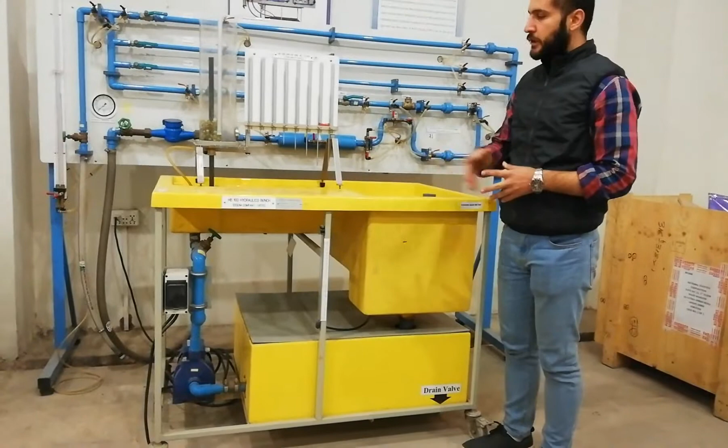Its orifice setup. We have set it on the hydraulic bench. I have already told you how the hydraulic bench works, how it flows and how this range works. Before going into details of the hydraulic bench, we don't have enough time, so we are directly going into the orifice meter.

Here it is attached, connected with the input valve, and here the supply goes on. This comprises a tank with an overflow valve. If it overflows the limitation, it will go down and overflow here. It comprises, you may say, needles with different calibrations. Here it is in centimeters.

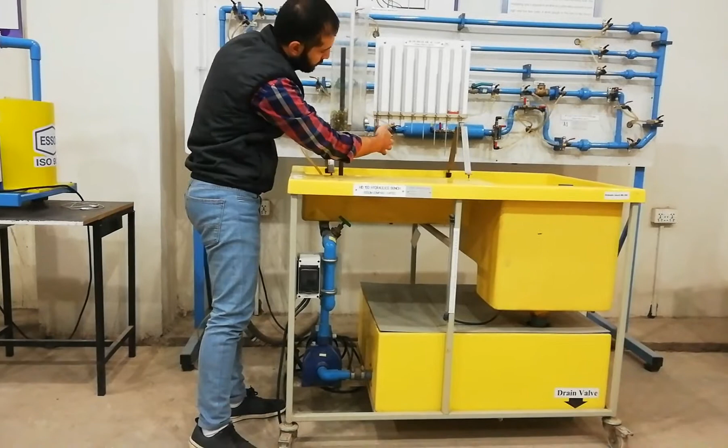So it comprises at least 1, 2, 3, 4, 5, 6, 7, 8 needles to show the measuring heights. Here, if it can be seen from here, it comprises an orifice. It is 4 millimeters in diameter. So we already know the diameter of the orifice.

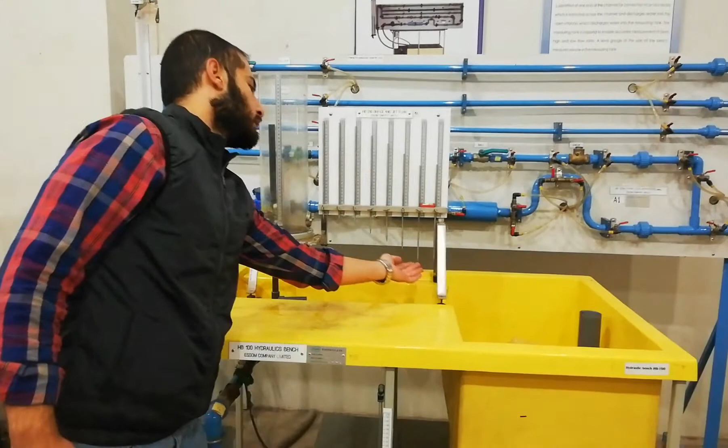Now what is the principle? Actually the principle is that it just touches the tip of the needle and it goes and is stored in the tank. So I am going to switch on that valve and find out the behavior. Our target will be to know the x and y coordinates of that flow, because we are going to find the x coordinates by having different measurements, and the y coordinates, so that it only touches the jet flow. It is not interfered with by the needle, it only touches the flow gently. Okay.

I am switching on. The overflow has been set. We may vary it, but it's set at about 29 centimeters, and the orifice behavior has been shown. As you already know, an orifice is an opening through which the water flows.

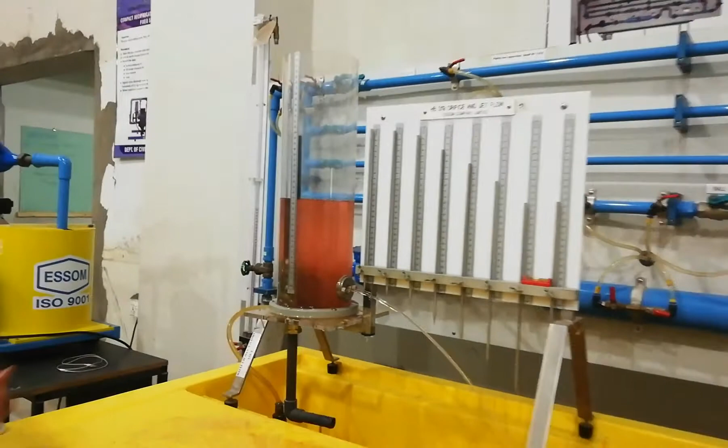Now our target will be to show the smooth flow with only touching of that needle, and after that we are going to find out the XY coordinates of that jet flow and the discharge by storing in the volumetric tank according to the time. Now what I am going to do is set the needle gauges.

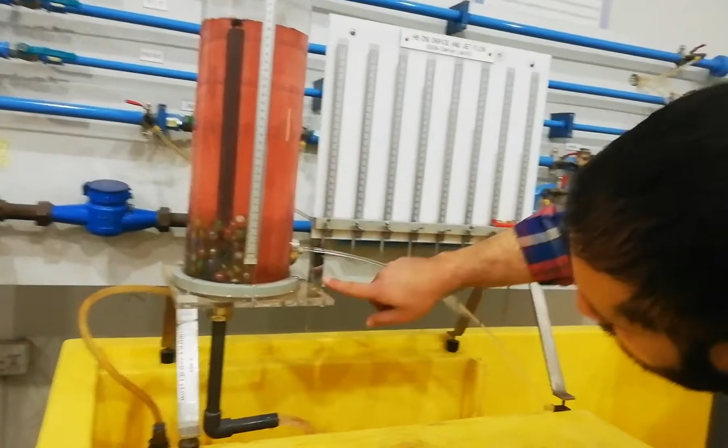It can be seen that it only touches the flow. Okay, it's not touching, it's a little bit above the stream. So we are going to adjust it a little bit. Now it's touching again. Gently, we have to be very careful for that. Gently making it down. And it's okay. Can you see that it only touches?

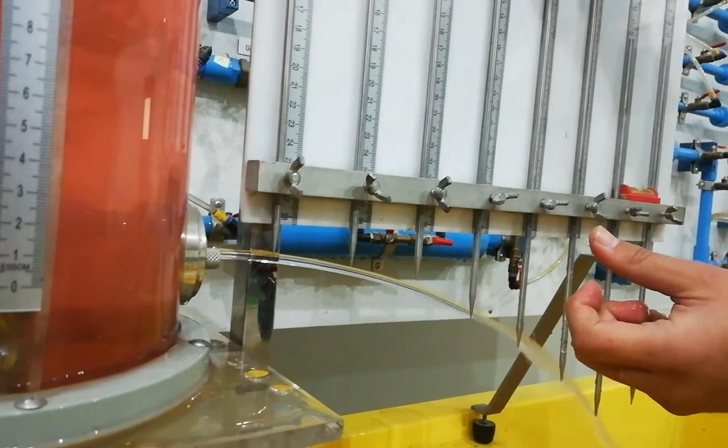Now here there's a gap again. We have to make sure that gap doesn't exist. Gently making it down towards the flow. Okay, again it's touching and disturbing the flow. It's just touching the stream. Again it's compressing the stream, and we are going to make sure it only touches the stream.

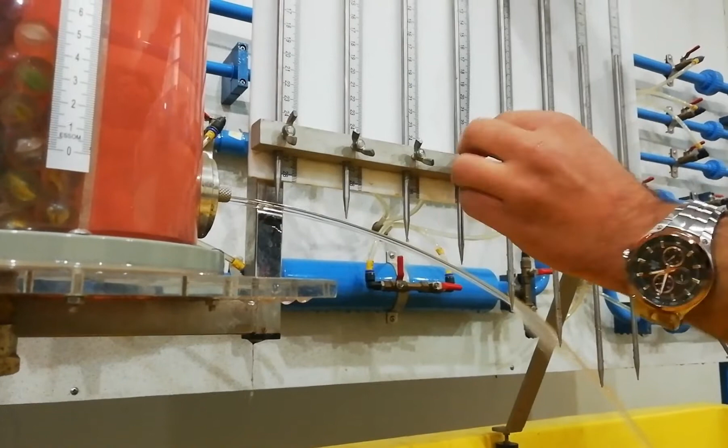Again it's intersecting the stream flow. We are making sure that it touches but doesn't vary or disturb the flow. Again the path is not disturbed by this needle, and after this we are going to find the jet coordinates. The coordinates may be measured by x-axis and y-axis, and it's simply a concept that the y coordinates will be measured by the ruler. It's already provided here.

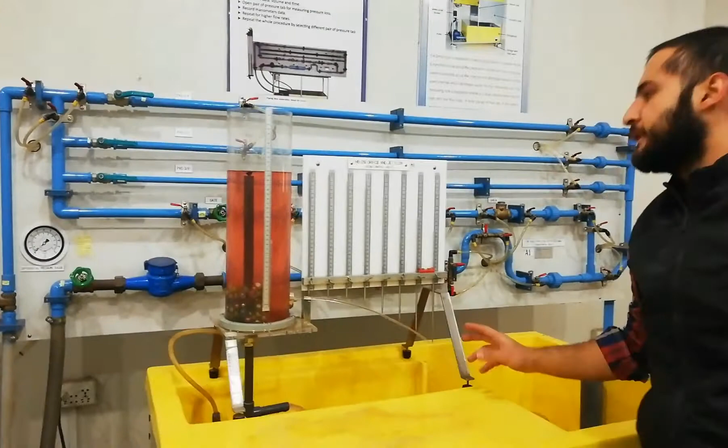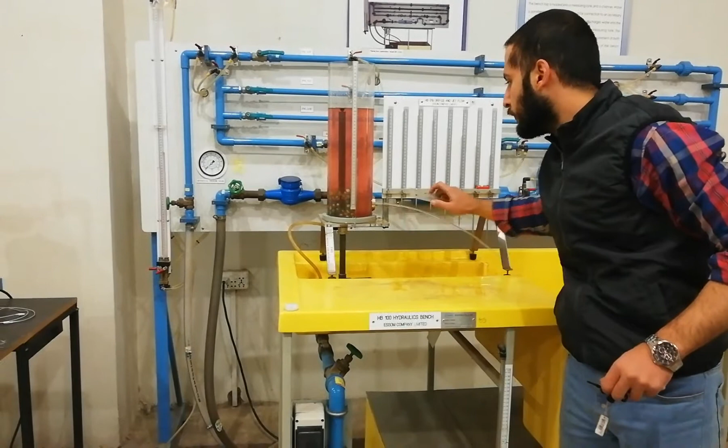It's still fluctuating, but approximately we are going to have our maximum preciseness, as human error exists. It's fluctuating, but we use our visual eye to make sure, and now I'm pretty sure that it only touches the tip of that needle. Now what is to be done is, firstly we are going to find the x coordinates. Here we take x1 as 0, and x2 will be from the precise mid to the mid, it's 5.

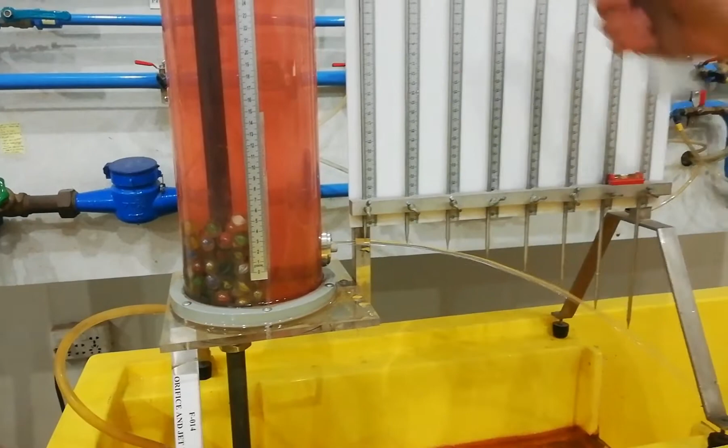Approximately, it's 5 centimeters. So x1 will be 0, x2 will be 5 centimeters. And y1 will be 0, y2 will be about 0.6 centimeters.

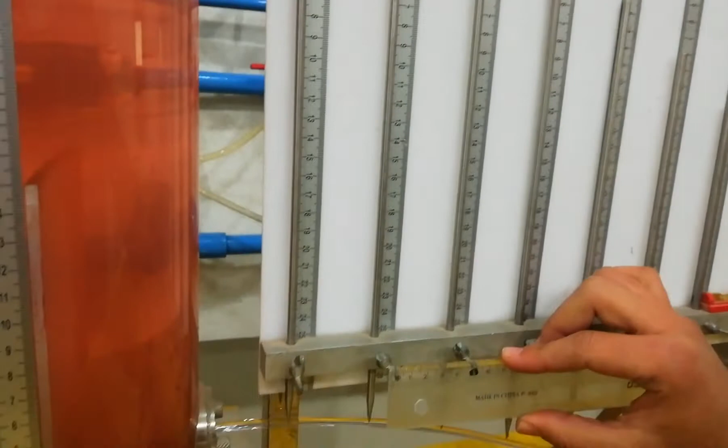Now, thirdly, y will be 1.9 centimeters with the horizontal coordinate of 5 centimeters. For the fourth, it's about 3.1 centimeters for y, and the distance will again be 5 centimeters.

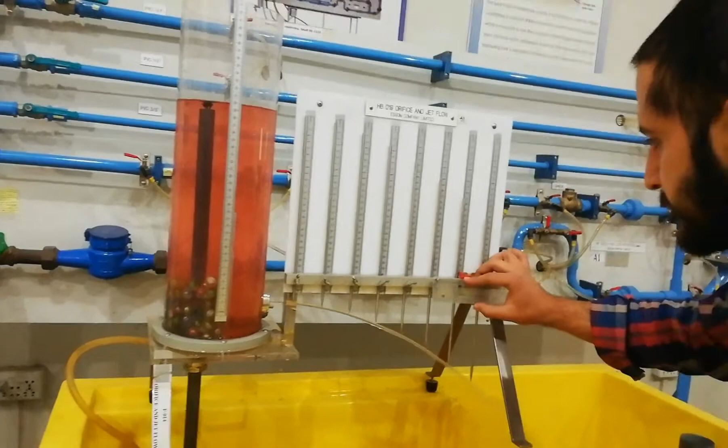So going further, it's approximately 5 centimeters for each of the x-axis, and for the y we are going to find out each coordinate. Now it has been done.

Now I will take a jug. Measurement has been done in milliliters and liters as well, so don't get confused. I will go for the liter, 0.5, 0.7. I am going to take approximately 1 liter to find out the discharge according to the stopwatch.

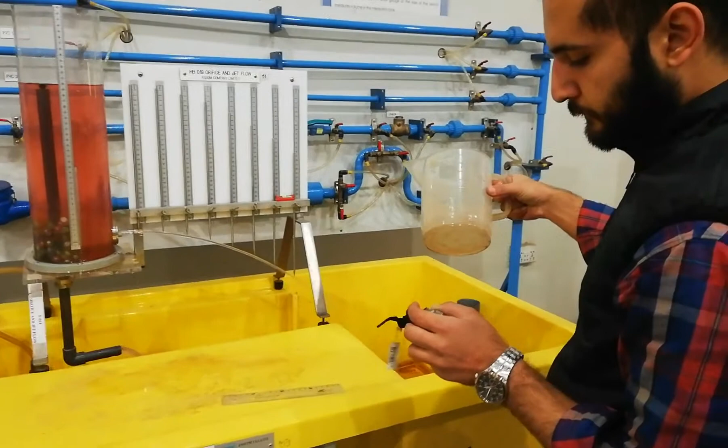So what I am doing is asking my fellow to start the stopwatch and collect a volume of about 1 liter. So let's start.

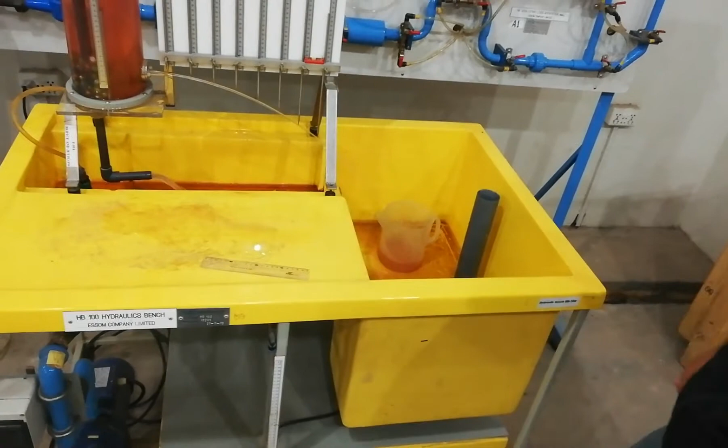Our flow is not disturbed, and that's eased by the needle. It's about 1 liter in a time of 20 seconds. So the stopwatch has been used to record that volume of 1 liter in 20 seconds.

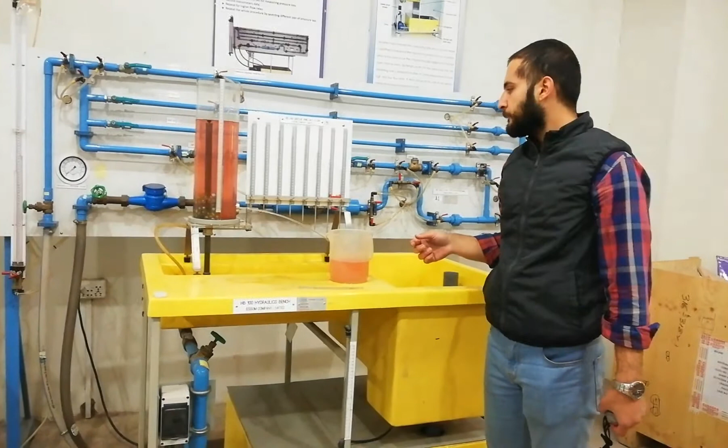So CD is equal to actual discharge divided by theoretical discharge. CD, the coefficient of discharge, has been found out, and now the coefficient of velocity will be found out by using the coordinates. That's how we will use our orifice meter, and that's how the demonstration will happen.

Thank you. So for now, observation and calculation of the flow through the orifice.

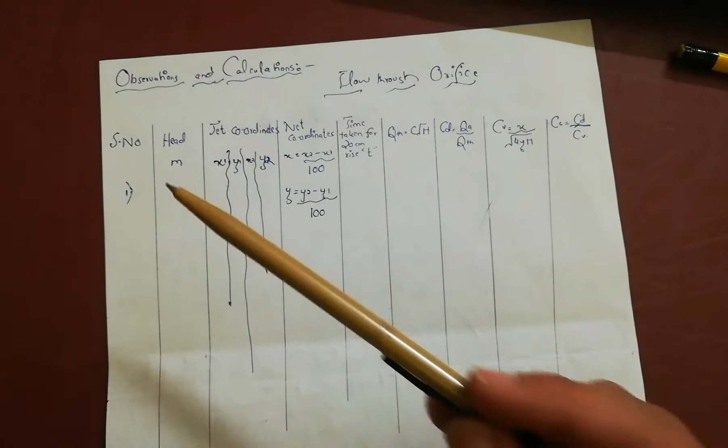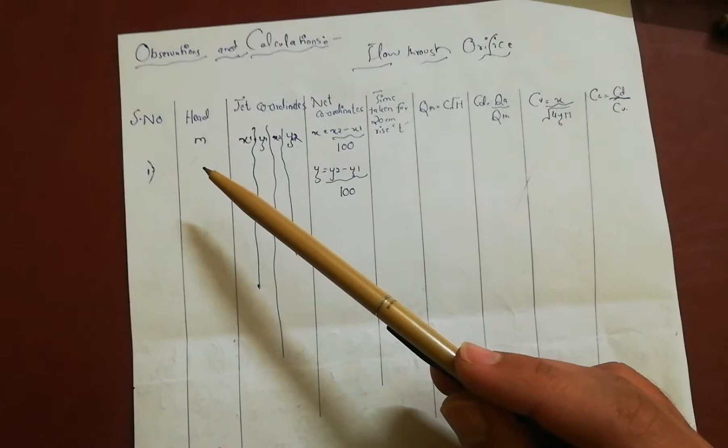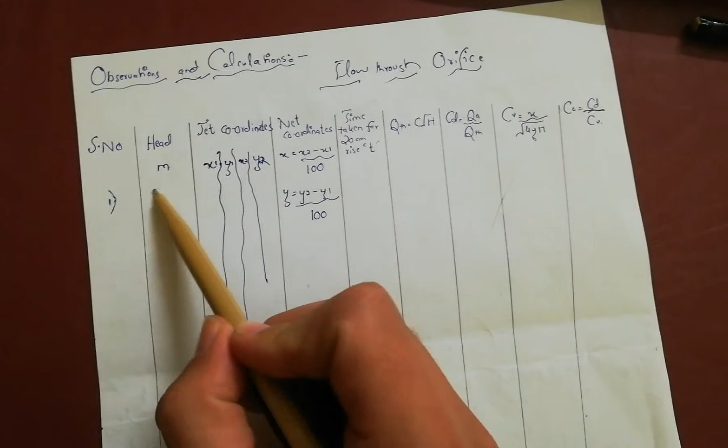Firstly, we are going to set the head as we wish, so sort out the overflow. As in practical, we may remember that we have taken our head as about 39 point something centimeters. So just put there a centimeter reading of 39.8 centimeters, or maybe 5, whatever it is.

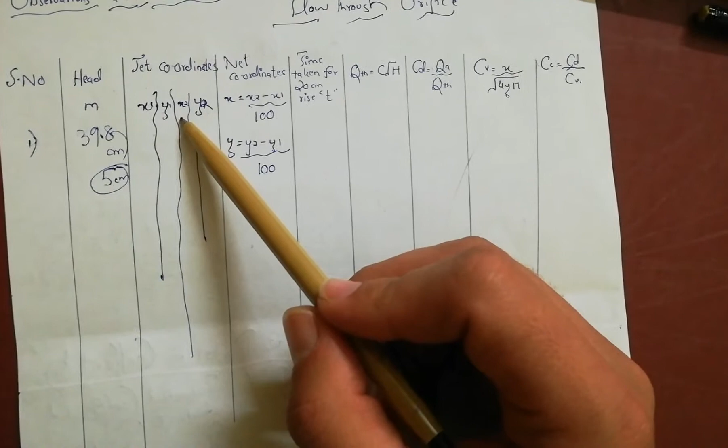Next column is the jet coordinates. The jet coordinates are x1, y1, x2, and y2. X1 is just the horizontal distance, and y1 is just the vertical distance. Similarly, x2 and y2 are the other coordinates which we have to put in the table. X2 is the horizontal distance measured by the second gauge needle, and y2 is the distance covered vertically by the second gauge needle.

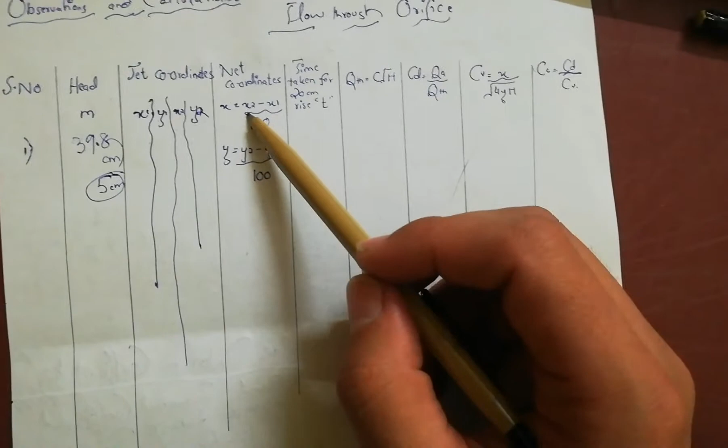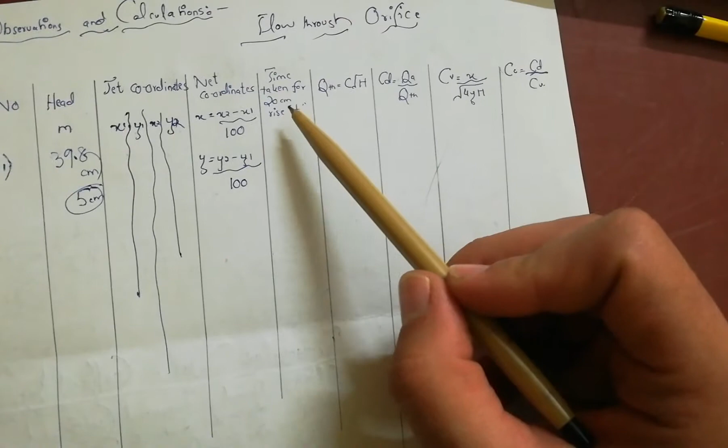Net coordinate x is equal to x2 minus x1, divided by 100, and y is equal to y2 minus y1, divided by 100. The minimum x2 minus minimum x1 can be obtained from these tables. The time taken for the 20 centimeter rise—we have taken just 20, but you may take 10, or even 5, or 30 centimeters. It depends on you.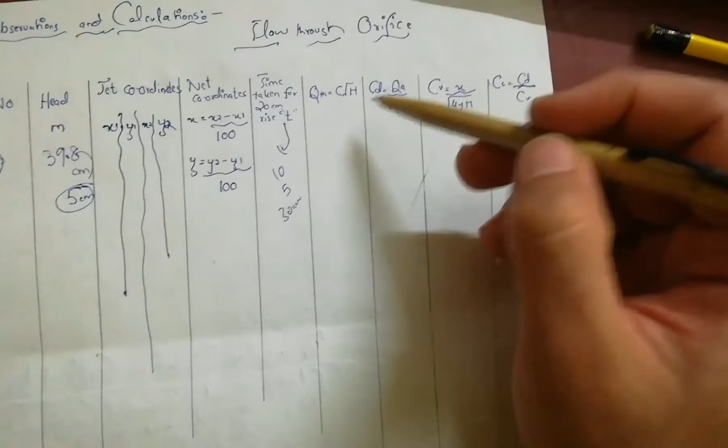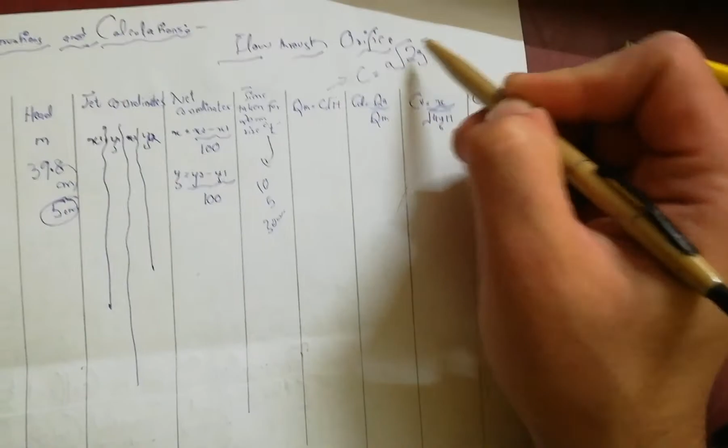Now Q theoretical is C into under-root H. Now C has been obtained, where C is equal to A under-root 2G. Now A is the area. So that's how Q theoretical may be found out.

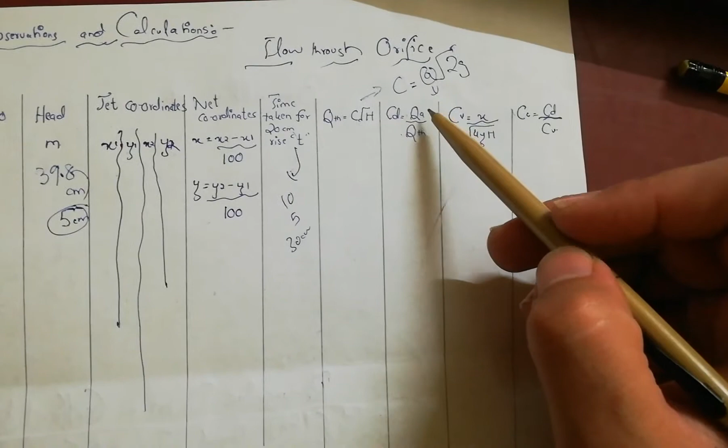Now CD is the ratio—coefficient of discharge is the ratio between Q actual and Q theoretical. So here is how the ratio may be found out.

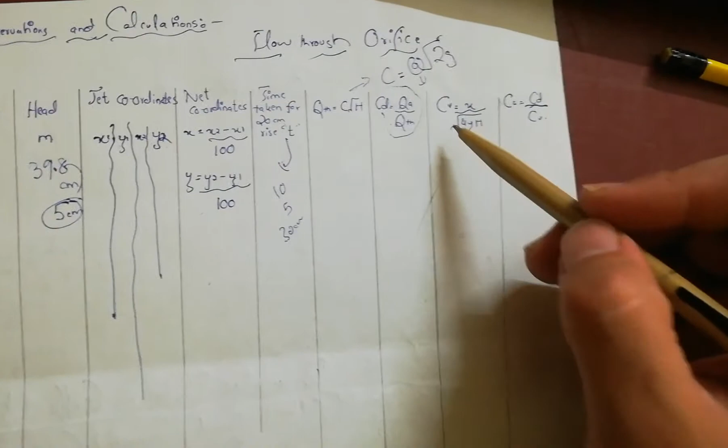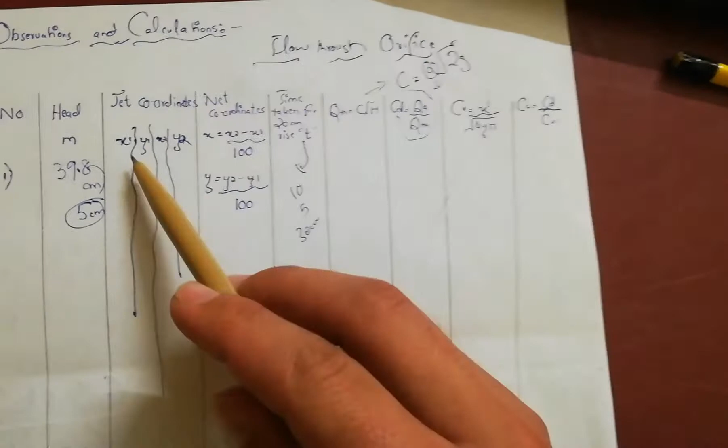Now going further, coefficient of velocity. For coefficient of velocity, x may be known and 4yH has to be found out. For the x coordinate, you may use that x1, and the use has to be made for that x, and 4yH has to be utilized using this head.

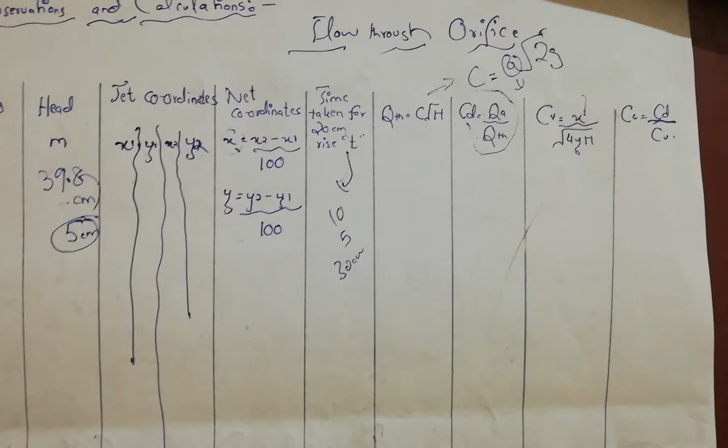The coefficient of velocity has been found out. Now coefficient of contraction has to be found out by using this CV. Put CV in, and since CD is already known, the coefficient of contraction may be found out by this.